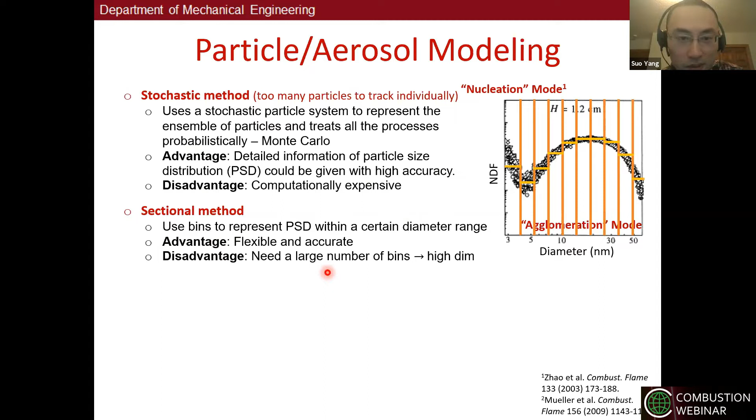So that could be very expensive because you need to solve like 100 transport equations for each section. Before listening to Luke's talk, I thought these two methods were the most accurate ones, I would say, but they're not very suitable for 3D or turbulent simulation because it's not computationally affordable. But it seems like Luke introduced this fancy machine learning technique to make them workable even for 3D turbulent simulations. Okay, anyway, let me go to my part.

In our group, we use the method of moments. Because these two methods are too expensive, rather than solve the PSD, we solve the statistical moments of the PSD. What do these moments mean? For example, the zeroth order moment you can imagine is the number density. The first order moment is the volume fraction, and you can get higher order moments. The advantage you can see is, compared to all of this, you have many fewer transport equations to solve. It's much cheaper. The disadvantage is you don't directly have a distribution from your solution. You can try to reconstruct them, but the reconstruction is not necessarily as accurate as one directly resolved by them.

The transport equation looks like this. You still have the convection term, thermophoresis term, and the source term. We don't have a diffusion term because soot is a solid, so the diffusivity is negligible.

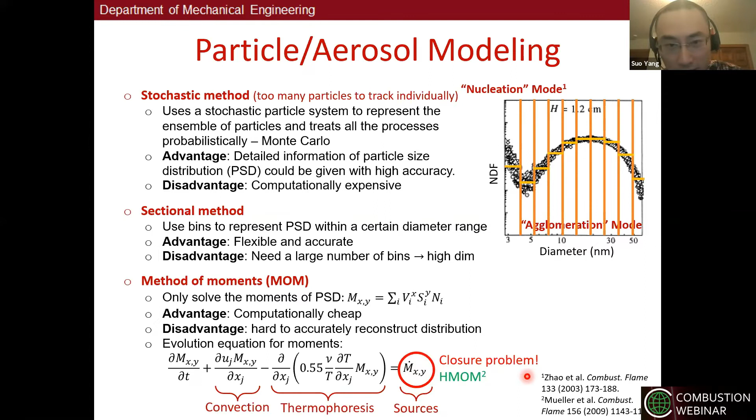But to solve the moments equation, you normally need more moments. It becomes a closure problem because you can only include a finite number of moments. So people raise many different ways to do this closure, and in our group we use the so-called HMOM, hybrid method of moments, introduced by Michael Mueller.

The basic idea is we know that we typically have a bimodal size distribution. So we can use a delta function to represent the small size mode, the first mode, and a log normal distribution for the second mode, because we know most of the larger particle distribution will be close to this.

How accurate is it? A few years ago, I coded up a sectional method to do the comparison. As you can see, for any quantities the moment method can directly calculate, its accuracy is basically the same as the sectional method. You don't see any difference.

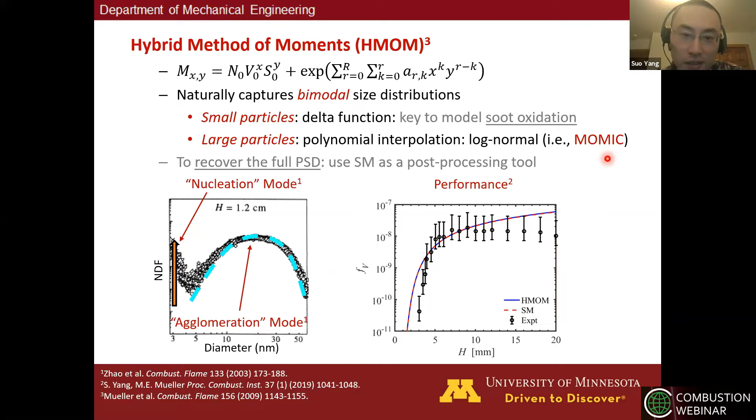And if you compare to experimental data for laminar flames, you can see how accurate they are. So I would say if you want a very accurate size distribution, you still need, say, a sectional method or stochastic method. But if what we care about is just the volume fraction, the moments, number density, the moments method is definitely enough.

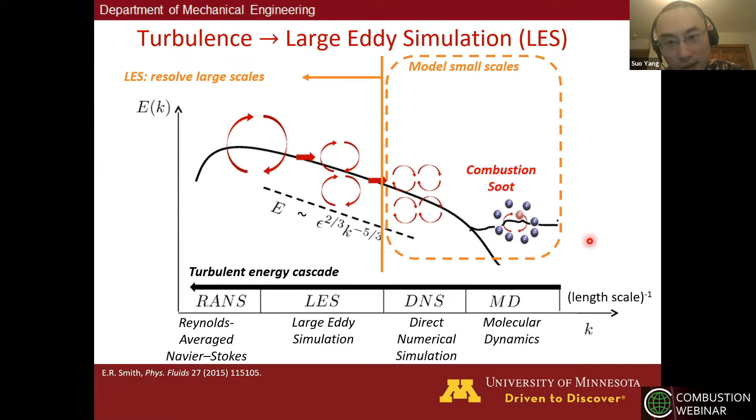Okay, so now let's talk about LES. This is just a basic introduction. In LES, we know we have the turbulent energy cascade like this. LES means we resolve large scales but we don't resolve small scales, we model small scales. However, combustion and soot are often in the small scales, which makes modeling a challenge.

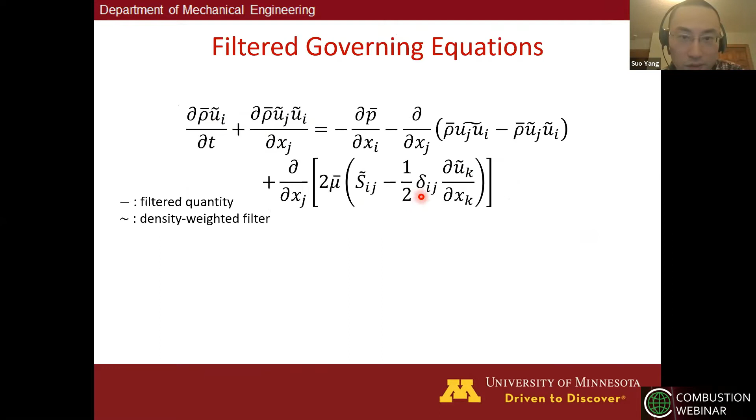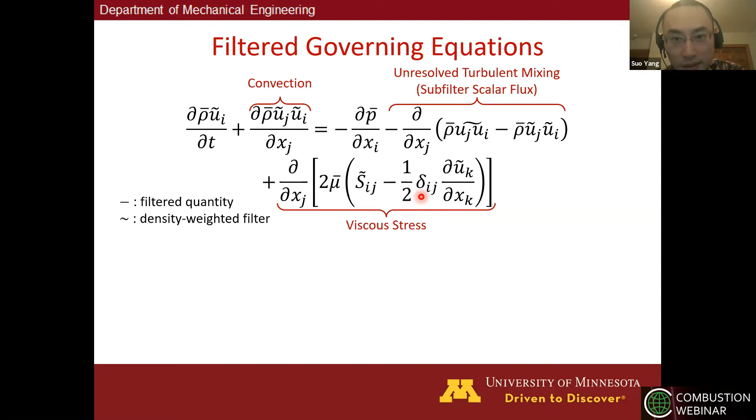In LES, our governing equations change, they become filtered equations, because your grid does not resolve all the scales, so everything is filtered. We still have the convection term, viscous stress, but because of this filtering you introduce some additional terms. Some people call it a subgrid scale, SGS, term. Some people call it a subfilter term. Anyway, they represent the influence from the small scales to the large scale.

The benefit is you directly resolve the large scale. That means, people think the majority of turbulent energy is in the large scale, and it depends on geometry, so you want to resolve them. Small scale, people think they are close to isotropic turbulence, easier to model. So many people think LES is enough.

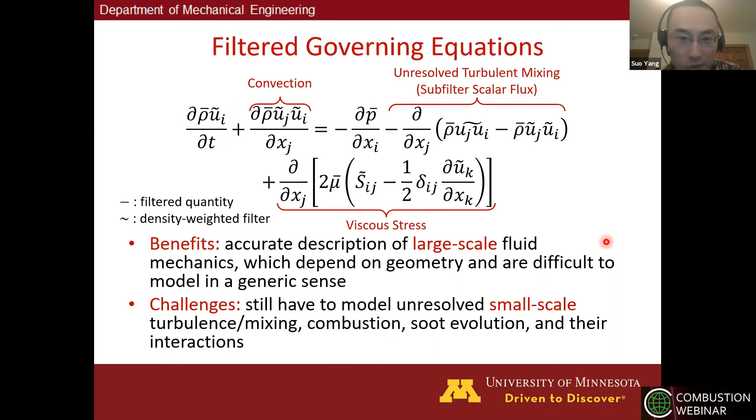However, we have combustion and soot. They are the challenge, they make the small scale more difficult. Okay, that's about LES in general.

How about combustion? For combustion coupling with the flow, here I'm going to talk about this RFPV model, radiation flamelet progress variable model. The basic idea is still about computational cost. If we have a big mechanism, say several hundred species, several thousand reactions, and you use finite rate, that's a nightmare because you have too many transport equations to solve. Even if you do reduction, you still have too many.

So the basic idea is, can we model the basic structure of the flame locally into some basic models like the counterflow, and then based on it build a lookup table. The key for the lookup table is you need to set up several parameters, and in the RFPV model I will show you which parameters to use.

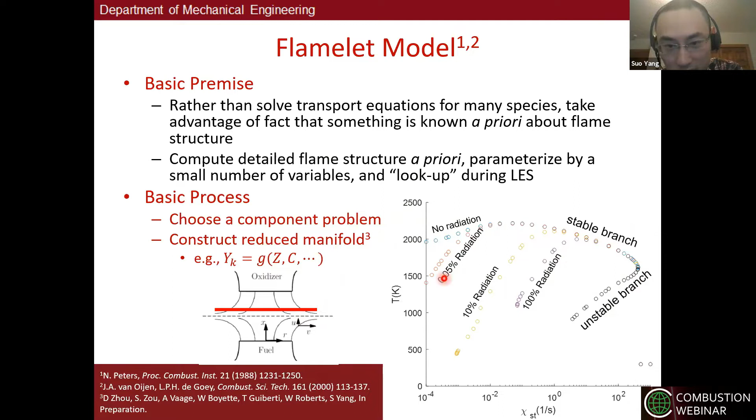This figure shows how the table looks like. We need to generate a lot of data points by the counterflow 1D simulation, and it's basically an S-curve. But in addition to the S-curve, for soot, radiation is very important, so we need to cover all the possible radiation levels. I only show 3 levels here as an example, but in the real table, all of this space is filled.

So what parameters do we want to use for this RFPV, or you can call it a manifold model, whatever you want to name it. In this model, any thermochemical variable can be considered as a function of mixture fraction, progress variable, and heat loss parameter. The reason we call it radiation FPV is we introduce radiation through this heat loss parameter.

This is from the 1D counterflow laminar flame simulation, so there's no turbulence effect. If you directly read this table in a turbulent combustion simulation, it's not going to work because there's no turbulence effect. So for any flamelet type model to consider turbulence effect, what you do is convolute your flame solution with a so-called presumed subfilter PDF.

You do a convolution, and then this 3 parameter table becomes a 4 parameter table. You introduce a variance of the mixture fraction to represent the turbulence effect.

Strictly speaking, we should also introduce a variance of C, variance of H, but based on many testing, variance of Z mixture fraction is the majority effect, and we don't want a too high dimension table. That will be huge because the 4-dimensional table is already 50 gigabytes or even larger, so we don't want more.

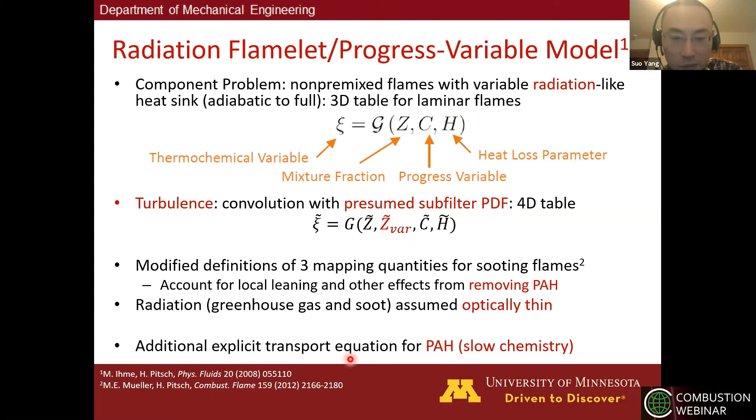The way we do it is use the table for other species, but for PAH, we want to solve a transport equation. But we don't want to solve too many transport equations because there are a lot of PAH species. So we do a lumped PAH species and solve one transport equation instead.

Okay, finally, I've finished the background introduction for the methodology. Now we can go to what we did. So first, now we talk about small scale. Small scale means subgrid scale modeling, SGS modeling, or you can call it subfilter modeling. So the first thing I want to talk about is the transport property, diffusivity.

If you look at the governing equations in the RFPV model, we have transport equations for mixture fraction, progress variable, heat loss term for radiation, PAH, and soot. One thing I want to point out: look at this, diffusivity for mixture fraction, diffusivity for progress variable.

What is this? For any species, originally in the finite rate simulation, we know the diffusivity. We can calculate the molecular diffusivity, and we can calculate turbulent diffusivity, and sum them up together. Here, mixture fraction and progress variable, they are not a species.

What are their diffusivities? Typically we get their diffusivity by assuming Lewis number equal to 1, because they are controlled by the major heat release species, and in the next slide you'll see they indeed have Lewis number equal to 1.

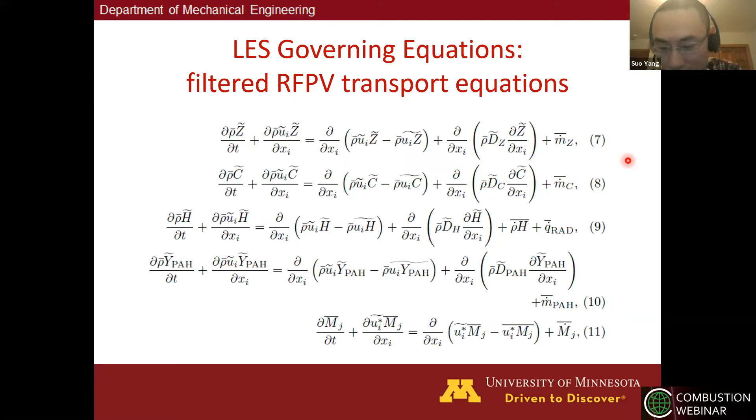But if you do that, how can you capture the differential diffusion? How can you capture it if in certain regions molecular diffusion is important? The way is we get the table from the 1D counterflow diffusion flame, and you try to capture those molecular differential diffusion effects there, but there's some problem there. That's why we did this study.

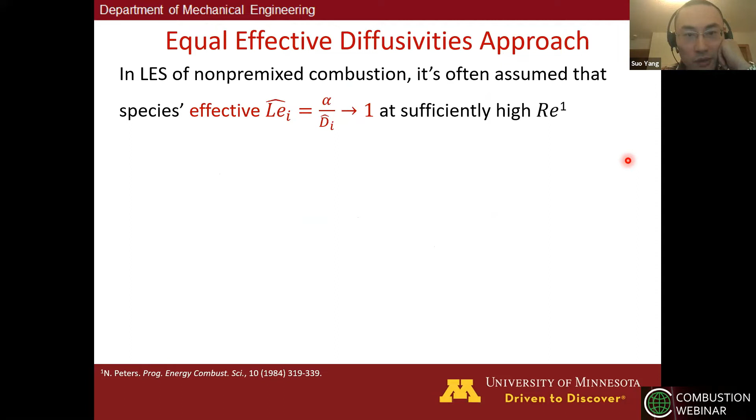So let's look at this. In the LES of non-premixed combustion, it's often assumed to have unity Lewis number, effective unity Lewis number. The reason is for most species, their length scale is close to the mixing zone thickness, and this length is normally much higher than the Kolmogorov scale, which makes molecular diffusion not that important, and turbulent diffusivity dominates everything.

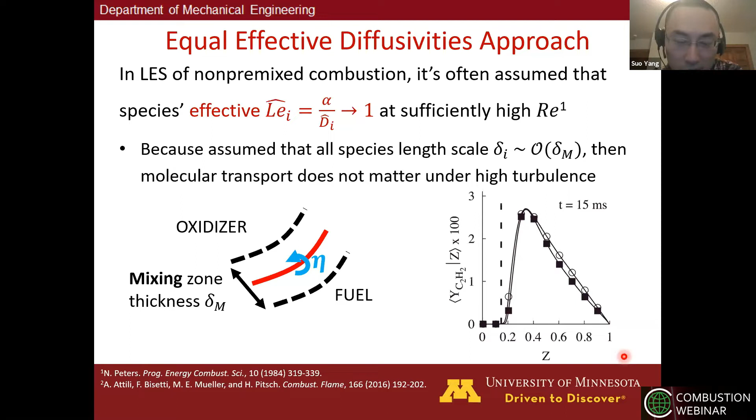So if you see this comparison, this is DNS data. One of the solutions considers molecular diffusivity, one didn't consider molecular diffusivity and just directly used Lewis number equal to 1. You can see they get basically the same solution, because molecular diffusion is not important at all. However, for soot, we know that

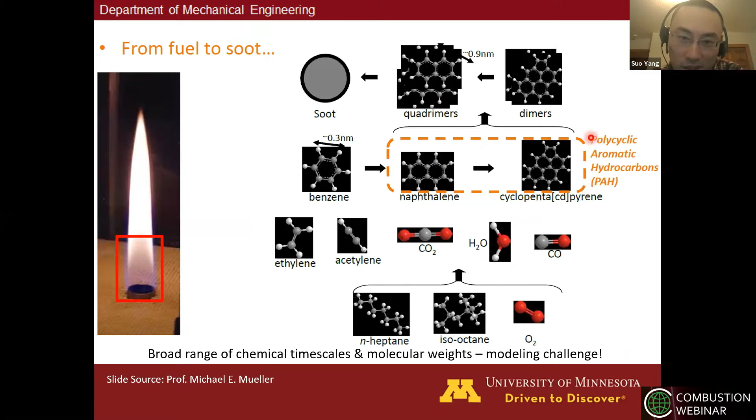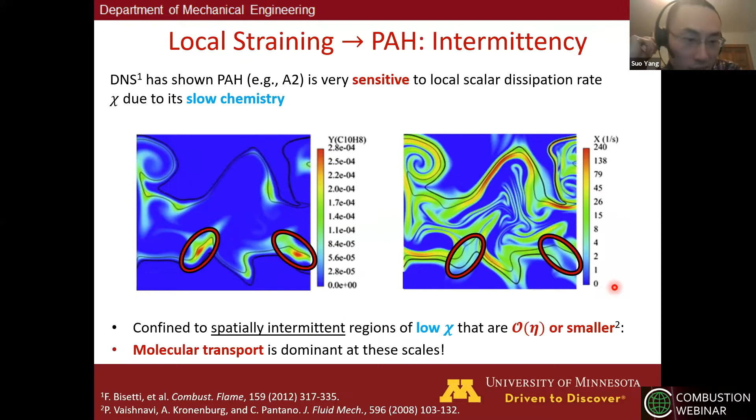one key thing is PAH, and we know that PAH has super slow chemistry. If you see some DNS data, you'll find PAH is located only in certain regions, and if you look at this region, they have a pretty low scalar dissipation rate. Whenever you have high scalar dissipation rate, high flow strain rate, there will not be any PAH there. So this makes PAH spatially intermittent. They're limited to regions at the scale of the Kolmogorov scale or even smaller. For this reason, molecular transport must be important for this type of species.

Okay, so if that's important, can we just use molecular diffusion for everything? For PAH, of course it's important, and if you want an accurate solution, you want to use that.

However, for other things, like OH and temperature, if you use purely molecular diffusion, you make a mistake, because turbulent diffusion is actually dominant. If you do a 1D solution that way, you find you are way off from the real DNS solution.

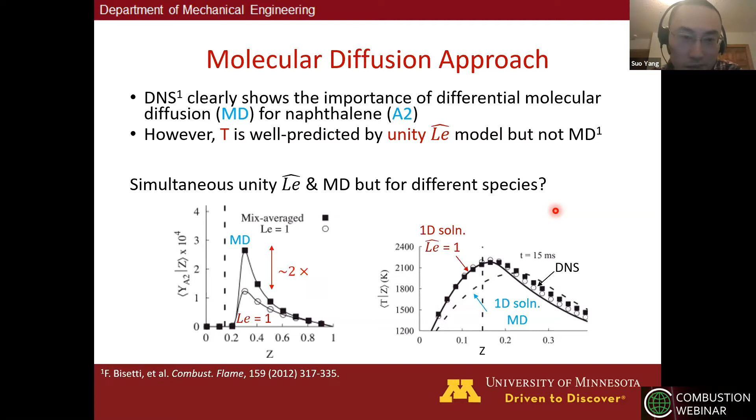On the other hand, if the 1D solution uses unity Lewis number, you match the DNS data. So here is the dilemma: some species want a unity Lewis number, some want molecular diffusion. How can we handle them? The way is, can we handle them simultaneously for different species? Based on this idea, we introduced a so-called strain-sensitivity parameter.

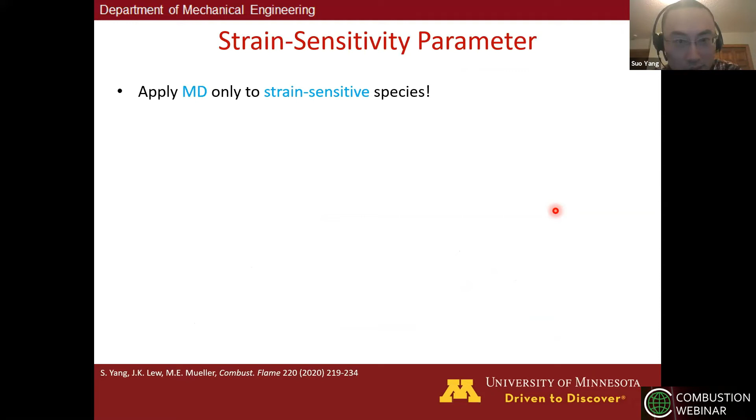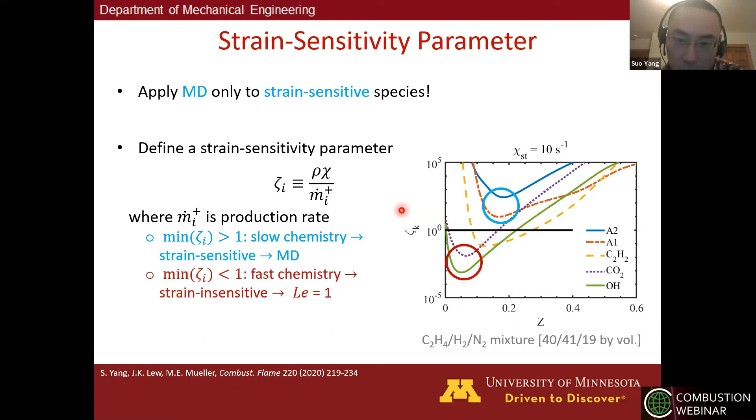We want to apply molecular diffusion only to strain-sensitive species. We define a strain-sensitivity parameter based on the scalar dissipation rate, representing the flow strain rate, and also a production rate to represent the chemistry. This lets us classify species: certain species have slow chemistry, meaning they are strain sensitive, so we use molecular diffusion. Other species have fast chemistry, so we use unity Lewis number. That's the basic idea.

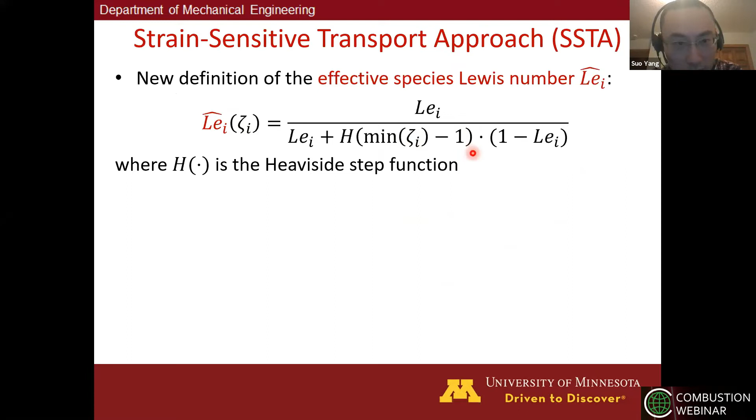How do we use this? We use this parameter to define our effective Lewis number, and then insert this effective Lewis number into the flamelet governing equation, derived by Pitsch, modifying some terms inside.

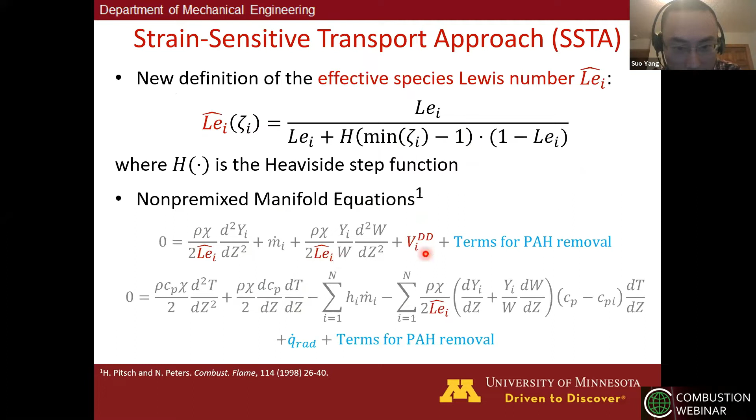First we do a priori analysis with respect to DNS, and you can see that our method and the unity Lewis number method match the DNS data very well. But if you use the molecular differential diffusion one, they're way off for both temperature and OH. So of course we can't use that.

However, for A2, if you use unity Lewis number, you get this curve. If you use the molecular diffusion model, you get better. Our new model, surprisingly, is even better than the molecular diffusion one. But of course, for OH and temperature, people already get very high accuracy nowadays, whereas PAH always has more larger uncertainty, as you can imagine.

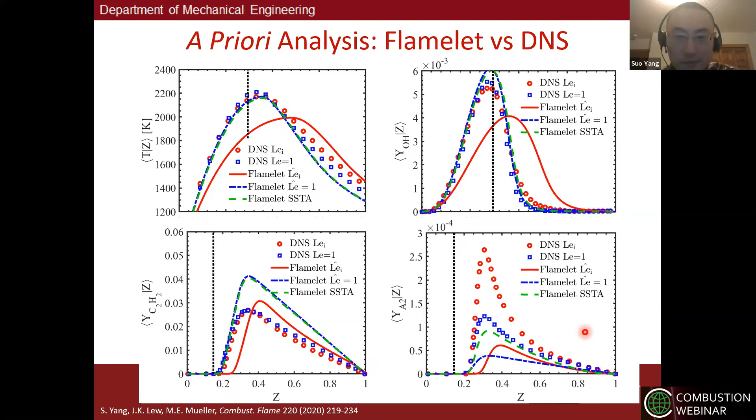How about the soot volume fraction? For magnitude, the new method, unity Lewis number, or whatever method you use, didn't show much benefit. The key thing I want to point out is the new method has a more accurate location of the peak soot volume fraction. So the benefit isn't very obvious here because the major deviation is in magnitude, and so we will go to our next model to handle the magnitude.

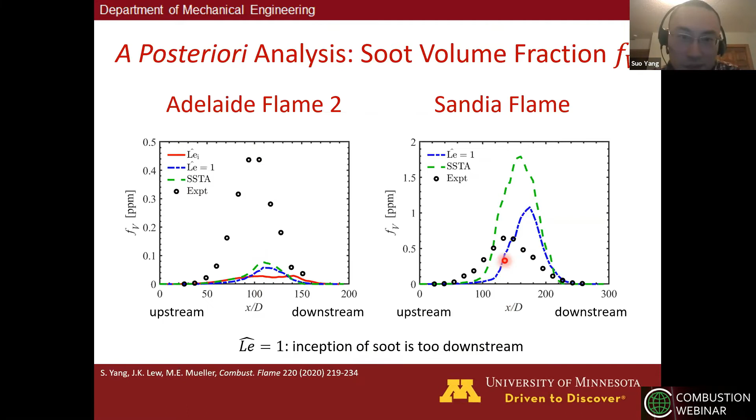So the next model is about the soot subfilter PDF. As I mentioned, we need to convolute with the PDF before using the table in the LES. This is the presumed subfilter PDF approach. As I mentioned, in LES all the equations become filtered equations.

Now let's look at the soot moment equations. They look like this. We still have convection and thermophoresis lumped in this term. We have unresolved turbulent mixing, or subfilter scalar flux, which is well studied, and people can use just a Smagorinsky model for it. The key challenge is the source term, how to handle the source term closure.

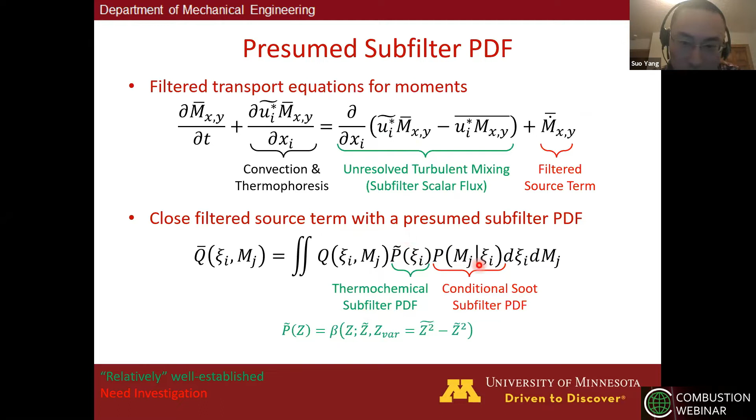The way is we convolute with the subfilter PDF, which can be further decomposed into a thermochemical PDF and a conditional soot PDF, conditioned on the thermochemical variable. The first one is well studied, and people normally use a beta distribution for it. The second one is our challenge, and that's what we need to do. But to model the second one, we need some motivation.

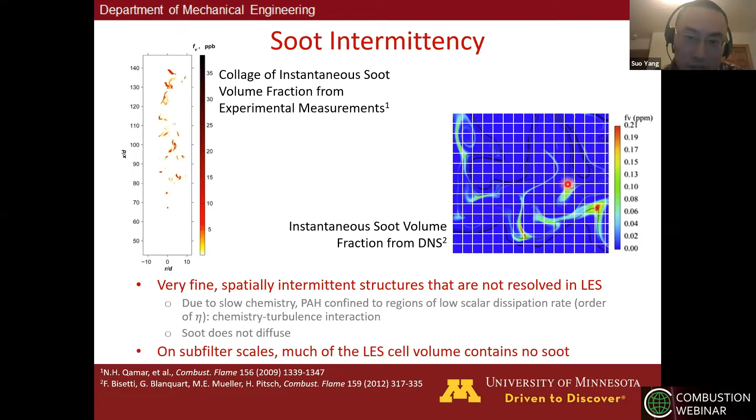The motivation comes from both experiments and DNS data. We see very fine, spatially intermittent structures that are not resolved on the LES grid. When we put the LES grid over the DNS data, many of the LES cells don't even have soot.

So intermittency is the motivation. How do we model intermittency? We normally use a double delta function. This was introduced by Mueller, introducing a sooting mode and a non-sooting mode. We use this omega to represent the intermittency, and we have a constant, MJ star, here.

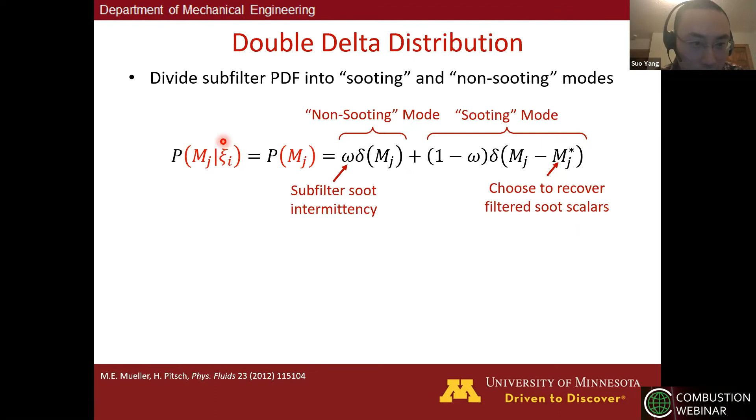We set this constant, and need to derive a formula for it such that when you convolute, you still get the correct average value. The key simplification here is originally we have a conditional PDF, conditional on thermochemical variable. Now we simplify to a marginal PDF, with no dependence on thermochemical variable. Mueller's original argument is that soot evolves on a much longer time scale than gas phase chemistry, which is very fast. So because of this time scale discrepancy, he thinks we can get rid of this condition.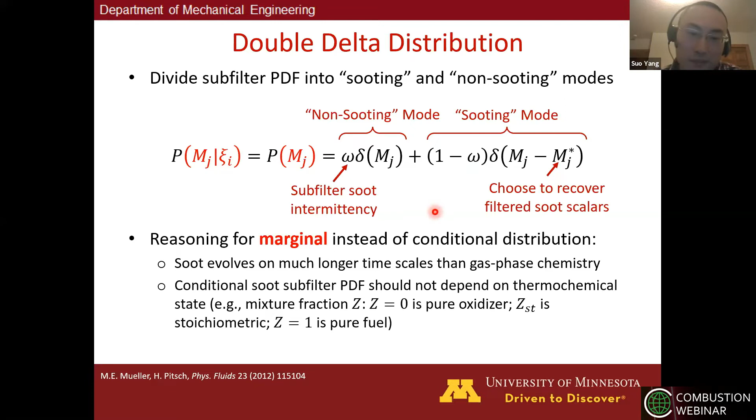Okay, is that true? That's the first test. For temperature, it's good. For soot volume fraction, what's the result? For Adelaide flame 2, we get a factor of 80 deviation. For Sandia Sooting flame, a factor of 20 deviation.

Recall that we tried the laminar flame. It's highly, super accurate, right? When you go to turbulence, the story completely changes. Now the uncertainty is so high.

Many other groups tried, including the Caltech group and the Michigan group. All of them have such large deviation from the experimental data. In the past, people basically multiply the prediction by 100 or 40 or something to compare with the experimental data, say we got the right trend, but the value is way off. But of course, this is not acceptable.

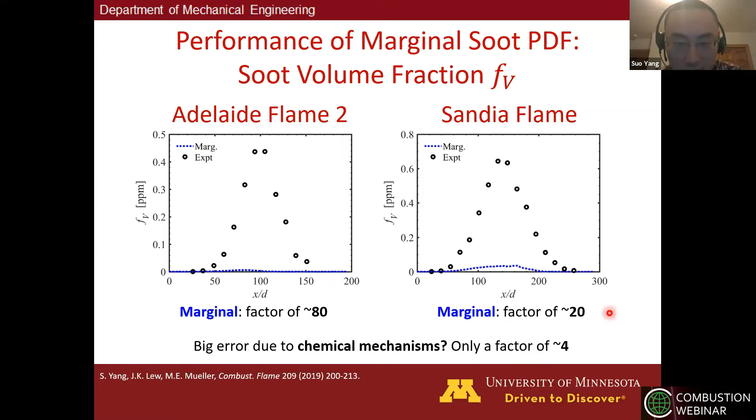So one idea is the chemical mechanism is the reason. We tested different chemical mechanisms. They can only give a factor of 4 difference, so definitely not the reason. So it must be the SGS model issue.

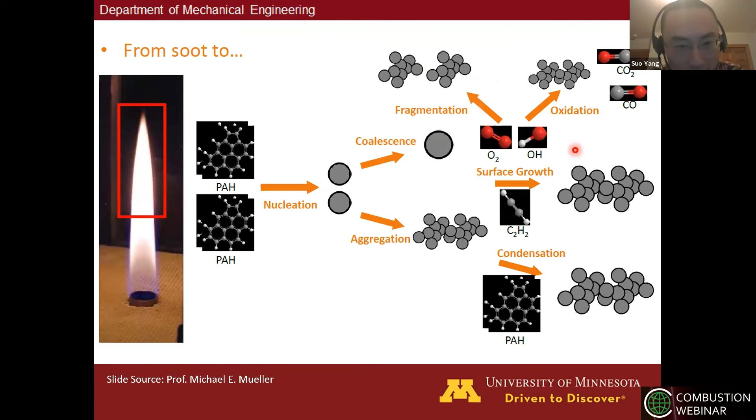How to resolve it? We go back to the detailed sooting process. We have coagulation, condensation, surface growth, oxidation, fragmentation. So what I did was look into all the detailed processes, and we found that nucleation and condensation are PAH-based processes. They are indeed super slow, super slow.

So your original assumption is okay. However, surface growth, depending on the acetylene HACA mechanism, is pretty fast actually. Oxidation, depending on OH and oxygen, is super fast. So these two are actually as fast as the heat release reactions. That means the original assumption of decoupling, that your conditional PDF can become a marginal PDF, is wrong because of this.

We also did the regime diagram. This is the region dominated by nucleation and condensation. This is the surface growth dominant region. This is the oxidation dominant region. We found that, at least based on DNS data, once you enter an oxidation dominant region, oxidation is super fast. All the soot will be killed immediately.

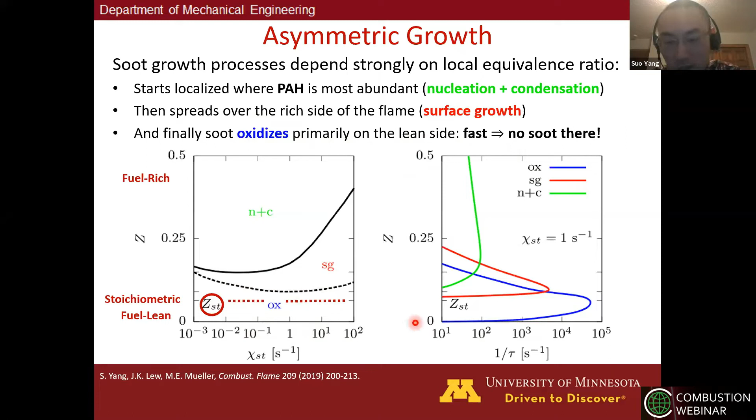So you shouldn't have any soot in the oxidation region. But in the old model, they assume there's still a lot of soot here. So the oxidation was over-predicted. That's why you have such low prediction from the LES.

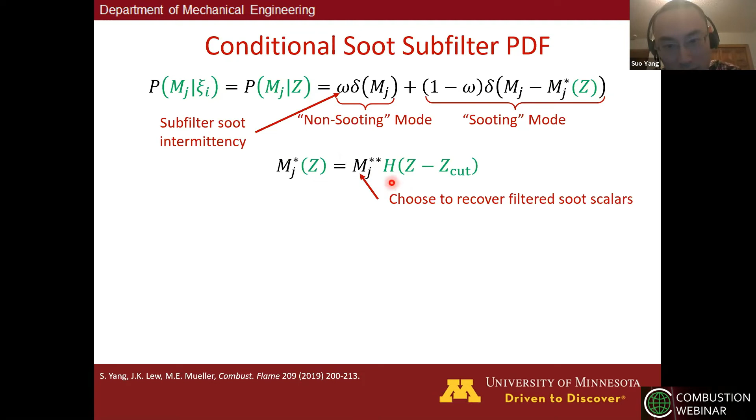So we introduce a new model. We want to keep the conditional PDF. The only simplification is we simplify this to Z, mixture fraction, rather than all the thermochemical variables. How do we do that? Originally we have a constant, and now we make it a function of mixture fraction Z.

The functional formula introduces a Heaviside function and this so-called cutoff mixture fraction. Cutoff mixture fraction is used to determine a region where oxidation is dominant. Whenever oxidation is dominant, we shouldn't have soot there. But how to determine that? The way is we dynamically compare the oxidation rate with the surface growth rate. This will form the boundary between the two regions.

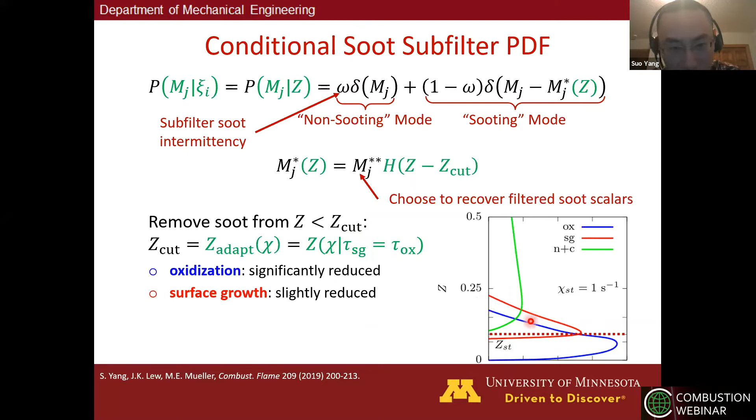So we do that dynamically in the code to get this value. And you can see if we do that, oxidation over-prediction will be significantly reduced. Surface growth will be slightly reduced, so hopefully okay. Nucleation and condensation will not be affected at all.

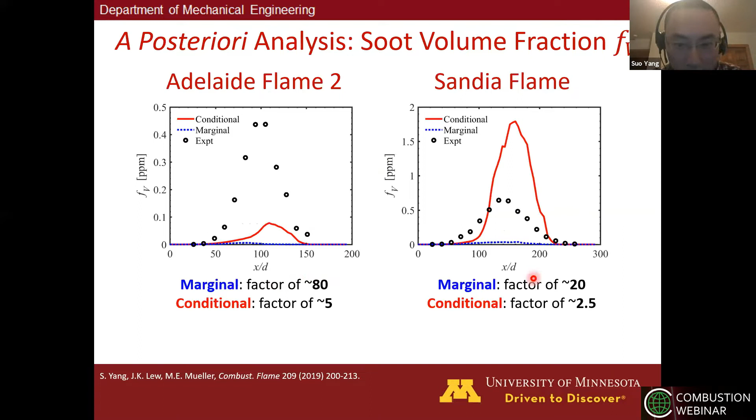Let's see the results. This is the temperature, again good. And for the soot volume fraction, originally we had a factor of 80 deviation, a factor of 20 deviation. Now everything is within a factor of 5. So this is much better, much better than the state of the art before.

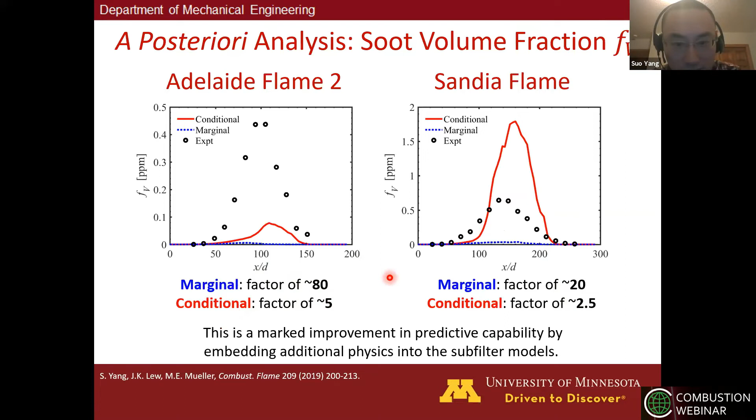And the reason is we add more physics. If we do some testing about the grid, we find this: if we get a finer grid, we can actually get closer to the experimental data. This is another piece of evidence to prove that the reason for the deviation really comes from turbulence.

Okay, and why can we get this? We did error quantification based on DNS data, and we found that, as you know, if we resolve everything, we have almost no error, which is here. This is the DNS point, and then you increase the grid size.

As you increase grid size, your error will increase, but a good SGS model will have its error increase saturate. For condensation and surface growth, this is indeed saturated. However, the old model for oxidation keeps rising, while our new model goes flat or can even decrease. This is why our new model is better, and we can show this: if this red curve is a coarse grid and the blue curve is a finer grid, you still get a lower error.

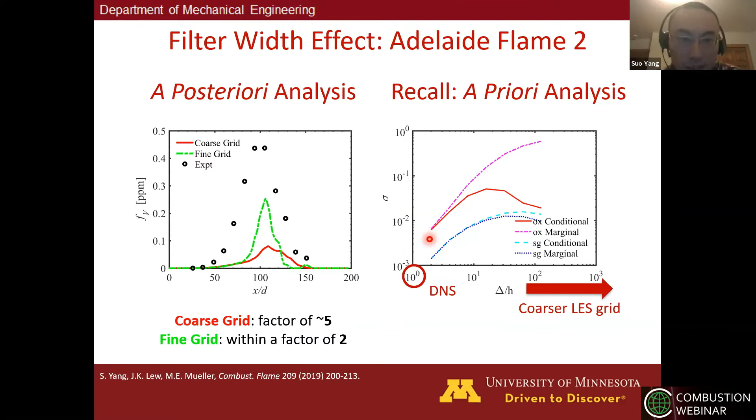Another thing we compare is changing the chemical mechanism. I mentioned the uncertainty is a factor of 4, and now we have a factor of 5 from the experimental data. If we use the KAUST mechanism rather than the NBPP mechanism, we actually get a very good result. This, I would say, is the best prediction so far in any work.

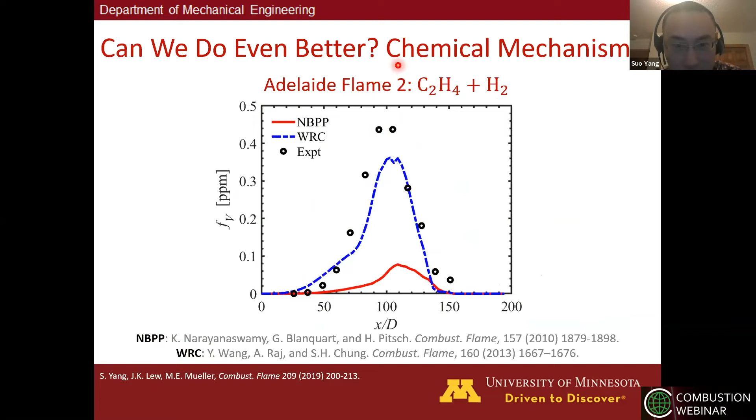We got such a good model that the project was sponsored by NASA with a partner, Rolls-Royce. Anand's group at Rolls-Royce started using our model for their EDS rig and real combustors. I can tell you they felt our implementation was a little complicated.

We use a dynamic determination of the Z-cut, which they call the Z-soot. They didn't want too complicated an implementation, so they set it as a constant parameter and played with it. But even set as a constant, it still gets a much better result than before. This is the before result, and this is the experimental data. Using our new model, they can match the experimental results much better, at least qualitatively.

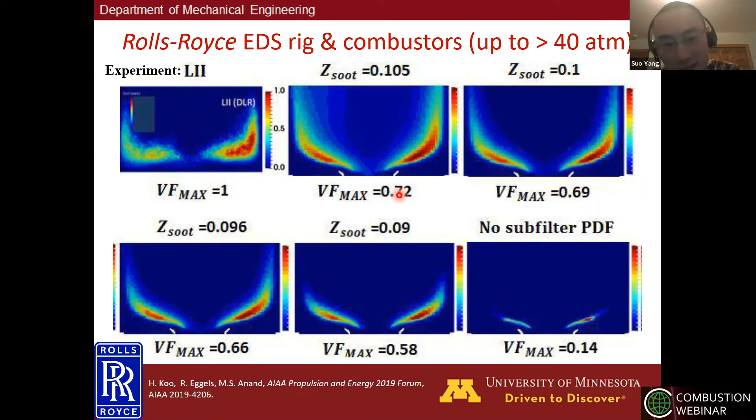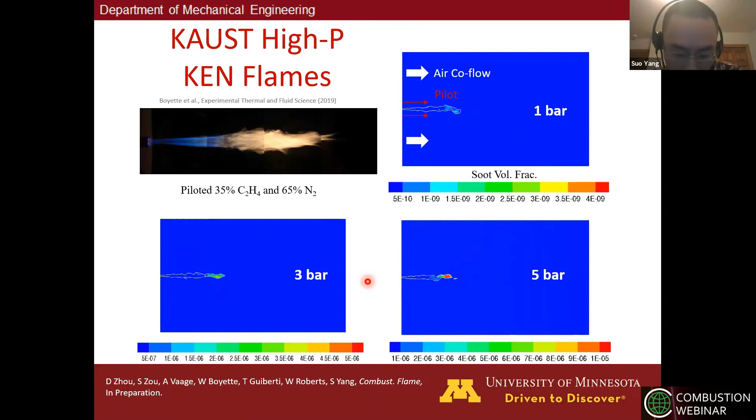Anand talked to me once and said our real engines are always at high pressure, but most fundamental studies come from 1 atm or very low pressures. He asked if we could do more studies on high pressures, and I said of course. So we collaborated with the KAUST side to test their newly generated Ken flames at elevated pressures. The pressure isn't that high, but I think this is a good starting point to study high pressure sooting flames.

Here is the result. Again we get a very good prediction, especially for 3 bar, with almost no uncertainty, nearly matching experimental data. For 1 bar we get under-prediction by 4 times, and for 5 bar over-prediction by 4 times. This is an interesting phenomenon: why under-prediction for low pressure and over-prediction for high pressure? We don't know. It looks like the SGS model has some sensitivity to pressure, and we want to study this in the future.

Another thing I want to point out is that another work tested this flame, from the Lindstedt group, using a transport PDF method plus a sectional method. The sectional method is considered very accurate for soot modeling, and the transport PDF method is considered very accurate for turbulent combustion. They put these two together, but the accuracy was the same as ours - not much better. We know these two methods are much more expensive than ours, so we use a much cheaper way to get the same accuracy.

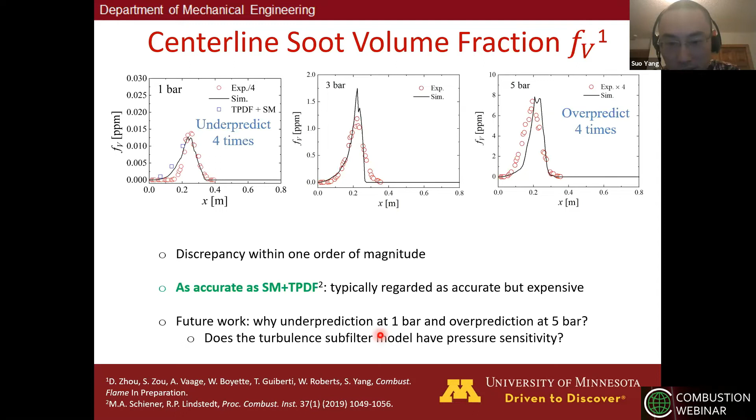Now let's go to the last part. I mentioned we might want to study SGS modeling for high pressure later, but we haven't done that yet. Another part that may be sensitive to high pressure is the chemical kinetics, so let's study that. But to study chemical kinetics, we want to get rid of the turbulence effect, otherwise they couple together and you don't know what we're talking about. So let's get back a little bit and look at the laminar flame.

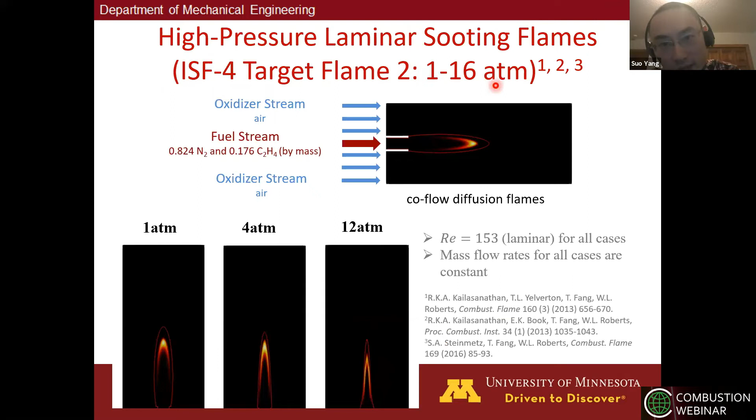We got the case from the ISF International Sooting Flame Workshop, the 4th workshop, target flame 2, again from KAUST. This one has elevated pressure from 1 to 16 atm. For chemical mechanism we tested 3 mechanisms. The first is NBPP, which has PAH up to A4R5. The second is a reduced version that only keeps A2 as the 2-ring aromatic PAH precursor, manually deleting C9H7, C9H8, and all species between A2R5 and A4R5. The last mechanism we test is a reduced KAUST mechanism, because the full KAUST mechanism is too large and too expensive. This one has PAH up to A7.

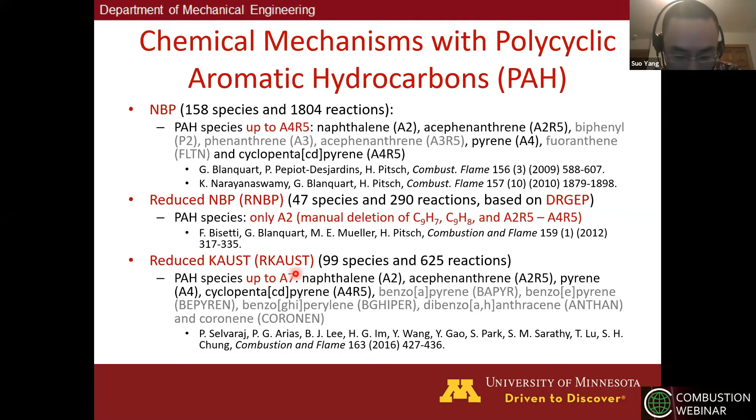So we want to see the effect of the high order PAH species. Okay, so first, this here is the simulation result.

Again, this is laminar flames. We are able to get very accurate results for laminar flames. Here you see how accurate it is. But you can see when you increase the pressure, the spatial distribution becomes more and more different. So at low pressure, we have better prediction, broader flame, and soot will peak near the centerline. At high pressure, there's larger discrepancy, narrow flame, and soot will peak on the flame wing in both simulation and experimental data.

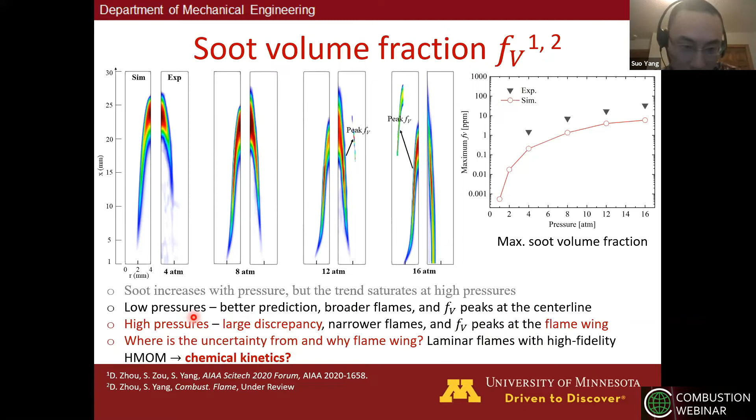So there are several questions we want to answer. Where does the uncertainty come from? Why at high pressure does it move to the flame wing? Because this is a laminar flame, we know HMOM is highly accurate and there's no turbulence effect. So the answer must come from chemical kinetics.

So first, let's look at the chemistry. We fortunately have some chemistry species measurement from the CoST side, and you can see that we have over-prediction for C2H2 and A1, but we have under-prediction for A2 and A3. In addition, for C2H2 and A1, even for high pressure, the error is not that large. But for A2 and A3, we have a huge error for high pressures. So one hint is very obvious: we must have something missing between A1 and A2, or something very inaccurate. So that's the place we want to improve the mechanism.

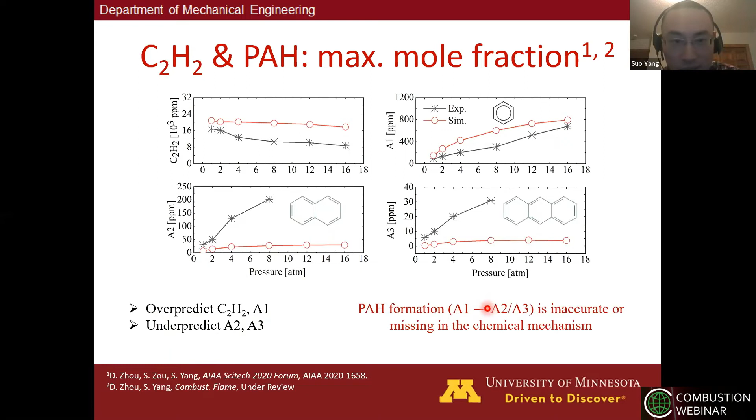But to do so, we need some tools. The tool is here.

So for any chemical mechanism, the key question is, we want to improve it, but where to improve it? The most traditional way is you do sensitivity analysis, like many people did in the past at the flame chemistry workshop. But when you have thousands of reactions, how can you do sensitivity analysis? There's no way. You always need some method to narrow down to certain reactions, then you do that. And the typical way is you do some sort of path flux analysis. These are some examples: DRG, DRGEP, PFA, and several years ago when I was in Wenting's group, we introduced this method, GPSA. So the key benefit for this new method is shown in this figure.

So DRG is the most original one. It's essentially a local greedy algorithm. For example, you start with a few species. You check the strength of each path flux, and you find, okay, this is 31%, this is 23%. So this one is important, let's go with this one. However, we have, say, 23% here. Later, they may merge to 69%. This is actually the dominant one, but you miss it because of this greedy algorithm.

Then later, the PFA method introduced by Wenting considers two generations, thinking maybe this can solve the issue. But what about convergence in the 3rd generation or 4th generation? So the final solution is we need to look at the big picture. The way is we set a starting species and an ending species, and we use graph theory to find all possible loops, all possible paths between the starting species and the final species. Okay, so that's much better.

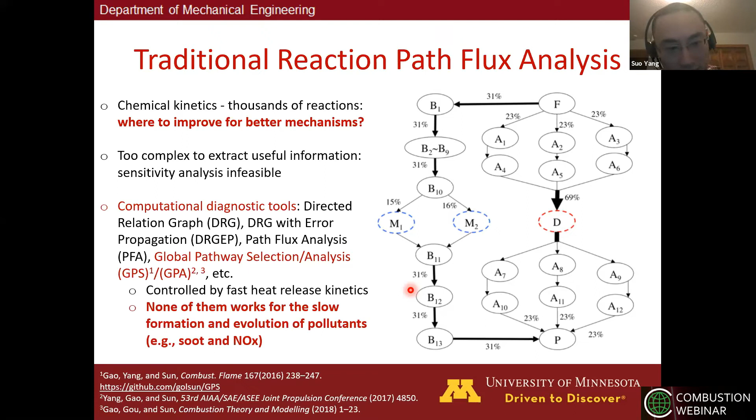The good news is this GPA method is actually very suitable. You can set the soot or PAH as your sink or hub species. Sink species means you have a starting species and an end species, and you set the ending species as the sink species. Hub species means if you know some certain intermediate species is very important, you set it as a hub, and in the graph theory algorithm, you enforce it—all the paths must go through it.

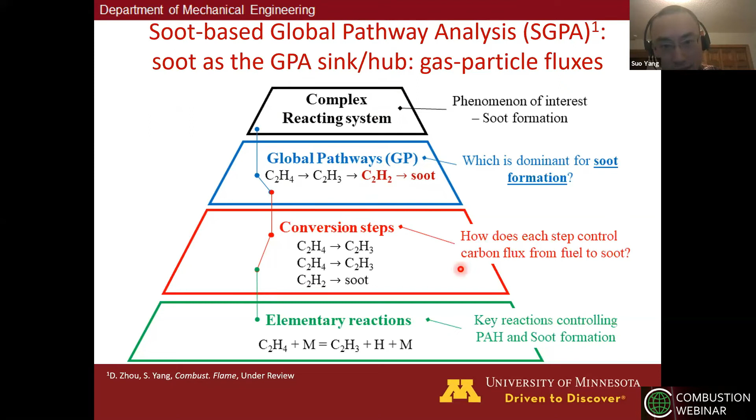By this way, we can understand the kinetics even for slow emission chemistry. Okay, so first we apply it using A2 as the sink species. For 1 ATM, we find the dominant pathway is this. For 8 and 12 ATM, the dominant pathway is this. If you compare these two, they share the green part, which we predict pretty well. They also share the red part, where we have a pretty bad prediction for high pressure but a pretty good prediction for low pressure. So if you compare, the only difference is this part and this part. But we know that the 1 ATM prediction is pretty good.

So for high pressure, this link must be the problem. If we go to the mechanism for this link, only one reaction is there. So the way forward is we need some quantum chemistry people or some good experimentalists to get a more accurate rate coefficient for this one. Once that is done, all this prediction will be significantly improved by just improving one reaction. So you can see how powerful this tool is.

I know quantum chemistry people and experimentalists are very good at improving the rate coefficients for reactions, but they need someone like us to tell them which one they should improve to solve the real problem.

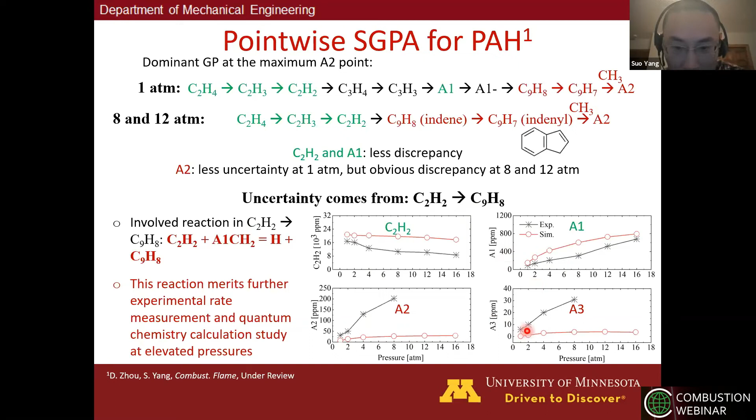Now let's apply it to soot. We do a spatial SGPA across the whole computational domain. For every grid point, we do the SGPA to find the dominant pathway at each location, and we mark different dominant pathways with different colors. Then side by side, we compare them with volume fraction, nucleation source term, condensation source term, surface growth source term, and other source terms. For the peak value and peak location of each source term, you can find the corresponding dominant pathway. This is how we figure it out.

So for one ATM, we find nucleation dominated by this pathway, condensation by this. The major finding is the major soot precursor for one ATM is only A2R5. First ring A1 formation mostly comes from C3H3 recombination. PAH growth is either HACA or the C9H8 to C9H7 reactions. This is for nucleation and condensation. For HACA surface growth, we only have one path, which is GP5.

Now let's look at 4 ATM. Of course we get a different global pathway. The major soot precursor, in addition to A2R5, now we have A2 as well. First ring formation via C3H3 recombination is no longer important, so no matter how much you improve its rate coefficient, it won't help at high pressure. PAH growth is similar to before. For HACA surface growth, originally we only had one path like this; now we have three more paths that are also important, and they dominate on the flame wing.

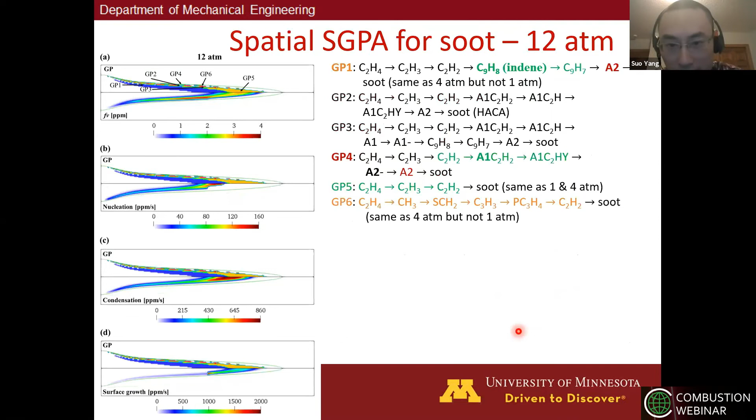At 12 ATM, one important change is that now we have a new path dominating on the flame wing. For the major soot precursor, originally we had A2R5 and A2; now at very high pressure we only have A2. PAH growth is still similar, and HACA surface growth is similar to before. Again we have something on the flame wing, mainly because now we have a new condensation path dominant on the flame wing. That's why at 12 ATM the soot peaks on the flame wing, unlike at 1 and 4 ATM.

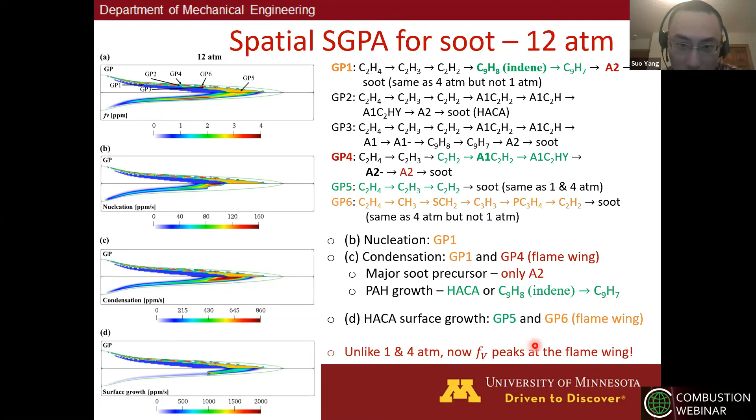So we answered the question at the beginning of this part. That's for the first task. The second task is we want to see the effect of mechanism reduction.

We know that by this reduction, they get rid of C9H7, C9H8, and anything between A2R5 and A4R5. What we found is, if you use this reduced mechanism, you get a very different spatial distribution at 4 ATM. Specifically, at 4 ATM we should still get a peak at the centerline based on experimental data and the detailed mechanism.

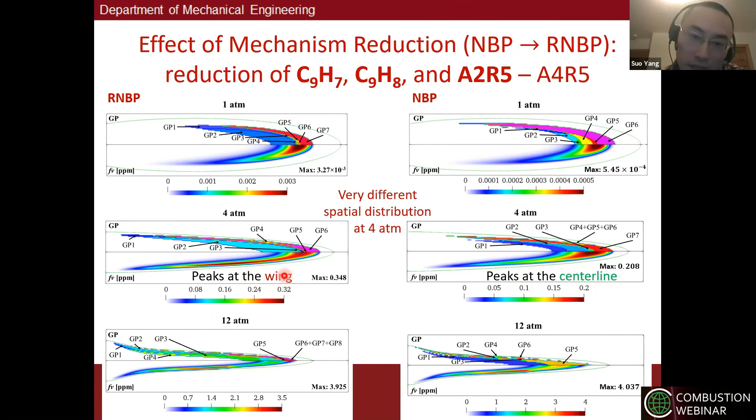But this reduced mechanism now has the soot peaking on the wing, on the flame wing. So why is that? We checked the flame wing global pathway and found the key difference is condensation. Based on the global pathway analysis, we found two key paths missing in the reduced mechanism, which results in this wrong spatial distribution. If you look at these two, you find this is because they got rid of C9H7, C9H8, and A2R5. If we get them back, they won't have this error.

So now you can see manually generated reduced soot mechanisms are so dangerous. In the future we will use our SGPA method to develop a new automatic and objective reduction tool to generate PAH soot reduced mechanisms accurately. But the key thing is we need a database. Unlike the traditional 1D or 0D auto-ignition database, like Tianfeng Lu's group used to generate reduced mechanisms, now we need a soot version of that database.

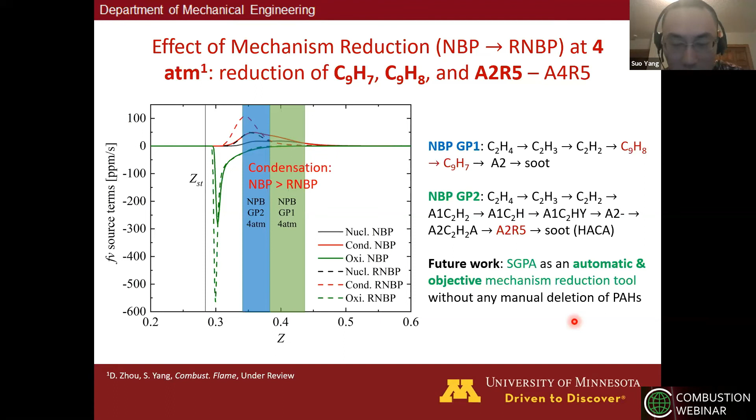The last thing I want to mention is the last task. We test the reduced cost mechanism. They also include A5 to A7. We want to know, are they really important? The first finding is, if you look at a single pathway of A2 between any species in A5 to A7 standalone, none of them are important. So actually, they are not important.

However, if we sum them up, we see the combined effect, and we calculate the dominancy of the combined pathway for all of this, and compared to the dominant pathway of the whole system, you find they are comparable. So the combined effect is actually important.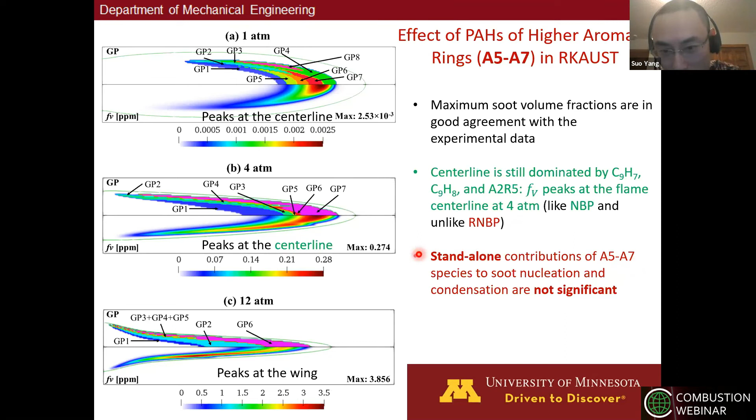So what's the hint of this to us? The hint is, if you give very detailed elemental reactions for A5 to A7, your mechanism becomes much larger and more expensive. But it doesn't worth doing so, because standalone, they are not significant at all. So the right way to do that efficiently is to generate a mechanism with a lumped A5 to A7. Then it's much cheaper, and only the lumped one has significant effect.

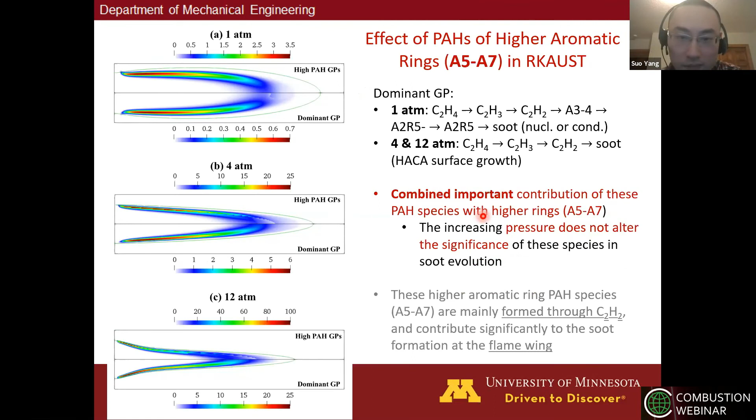Okay, so here is the summary of all the SGPA analysis I did, to save time I don't want to go over it. And here is the outline again to show you what I talked about today. So I think time's already up, so let me finish the talk.

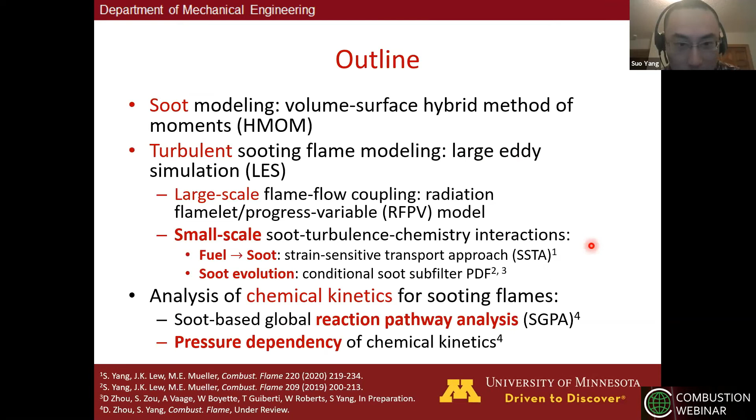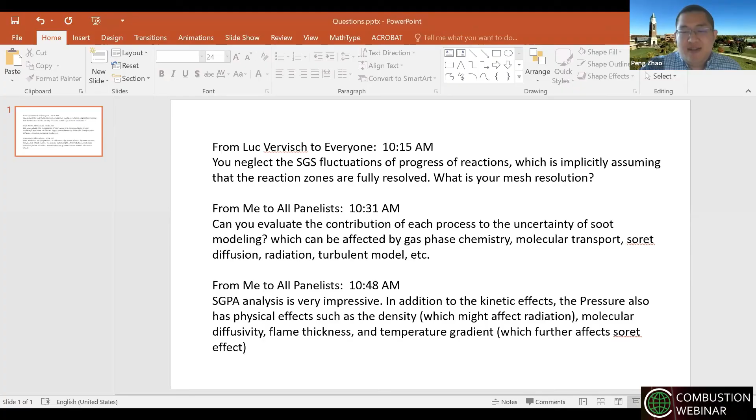Thank you very much for the very insightful talk. I do have three questions, let me share my screen. The first question is from Luc, and he said, you neglect SGS fluctuations of progress of reactions, which implicitly assumes that the reaction zones are fully resolved. So what is your mesh resolution?

I would say this: one idea is the reaction zone is fully resolved, the other idea is the reactions are fast enough. We know that for sooting flames, if you want to generate soot, you have really high temperature flame, high temperature reaction. It's not like a cool flame, which might be slower. When you have fast enough reactions, this SGS fluctuation of the progress variable is indeed not that significant. That's my answer. And as for mesh resolution, I cannot be sure, but at least based on our comparison with experimental data, we think it's at least good enough for heat release reaction, good enough for temperature, OH, all those things. It might not be good enough for soot, as I already showed in the grid resolution test, but that's an issue for the subfilter modeling to be further improved.

Okay, that's great, thank you for the very good answer. The second question, actually from me: I totally understand you're dealing with a very challenging problem, and you got very good physical and chemical insights from it. The second question is, can you evaluate the contribution of each process to the uncertainty of soot modeling? For example, how are these affected by gas phase chemistry and different precursors, molecular transport, Soret diffusion, radiation, turbulence model? So how do these complexities individually affect the soot volume fraction from your model results?

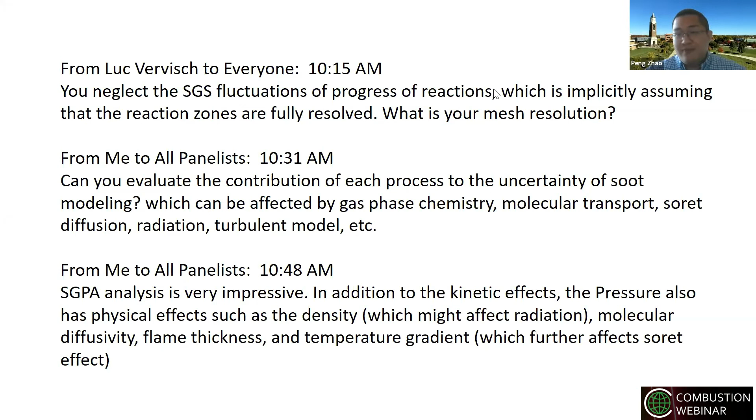That's great, thank you. We actually started to use it for turbulent combustion as well, and we have some results, but the work is not yet finished.

The next question is, how close to reality do you think the SGPA analysis is, and what would you need to get closer to the physical chemical reality of PAH soot formation? SGPA analysis is a post-processing tool, I would say. How realistic it is depends on how realistic your simulation is. Based on our comparison with experimental data, we think it's highly accurate, because for low pressure it's indeed very, very accurate. For high pressure, we have a deviation, but we get all the qualitative features. Like if it should peak in the centerline, it peaks in the centerline; if it should peak on the wing, it peaks on the wing.

The next question is from Professor Zhu. Soot modeling is very challenging because of so many complicated processes. If soot oxidation is important at high pressure, can the kinetic model even predict the key radical mole fractions like hydrogen radical, oxygen radical, OH at high pressure? I found it's even difficult to find the H and OH in hydrogen flames.

I agree with it very much. If we cannot handle the major heat release combustion well, there's no way we can handle soot well, because it's even more challenging. So, of course, we need to get very good predictions of temperature, OH, H, and all species. That's for sure.